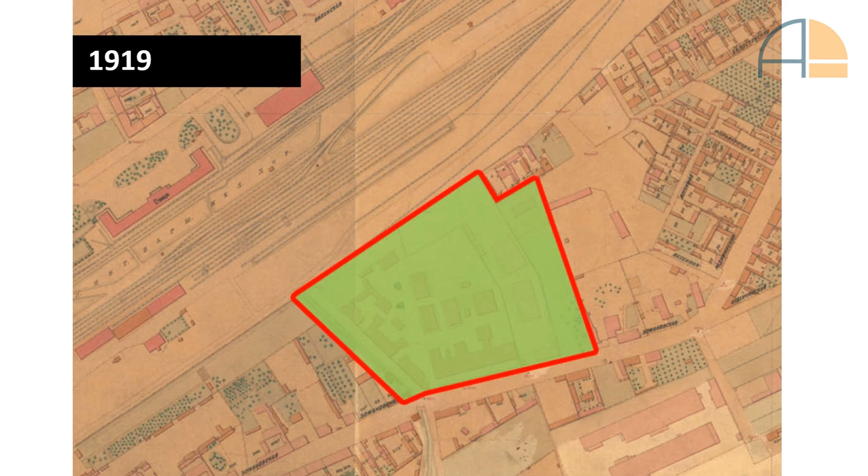In 1923, a national mint was located in one of the buildings, which I'm going to show you later at the end of the presentation.

By 1937, the whole parcel was very densely built up. What's very important on this plan are the railways. They served as a connection between the main railway and the neighboring railway network. What's important about them is that we liked the idea, we liked the shape, and although they weren't there by the time we started operating, we decided to make a resemblance in the project for the pavings. So if you pay attention later, you can see the railway-like patterns all over the squares.

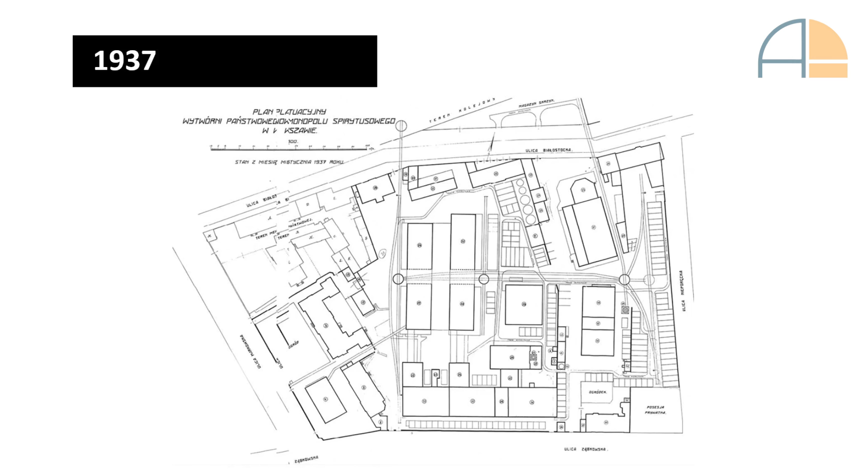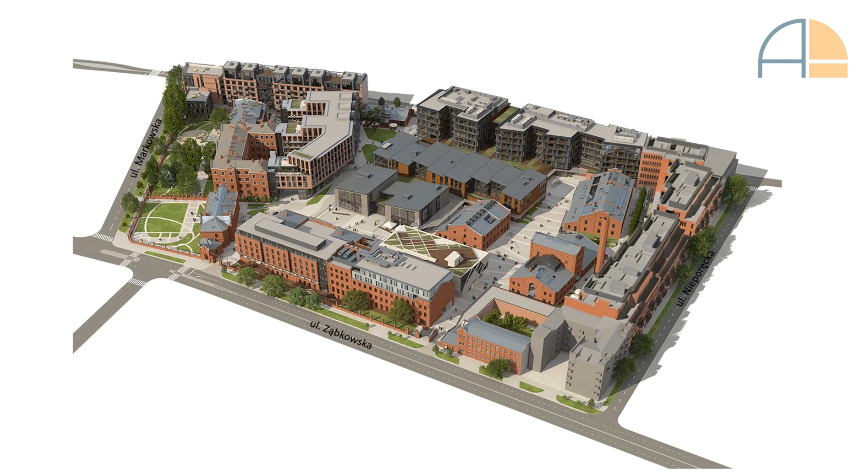So here we are. This is how it looks from up above. As you can see, it is a whole quarter of a street, a whole block, and you may notice that the buildings inside the interior are much smaller than those outside. This concluded in a feeling that when you enter the whole complex, you enter a different world. So that's a surprise.

This one here is the first one renovated, and also the most famous in the whole complex for its very ornamental architecture. This is where originally the management used to be placed.

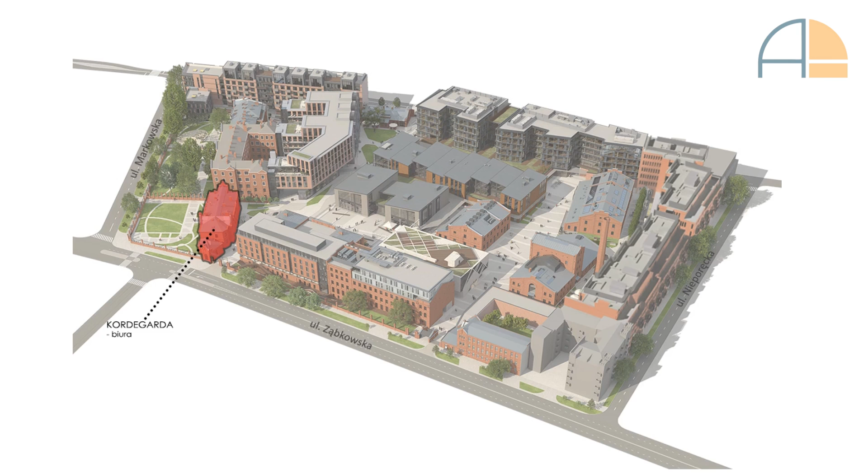Also residential, but new. These buildings, together with those I showed you before, form the residential part of the complex. One of the smallest heritage buildings in the complex was a workshop, and now after the revitalization it's going to serve as a restaurant.

The main part of the complex, formed by new buildings, contains offices and retail. As you might have noticed by now, the majority of the space is new buildings, so it was a hard task to make the old, the heritage, the most important.

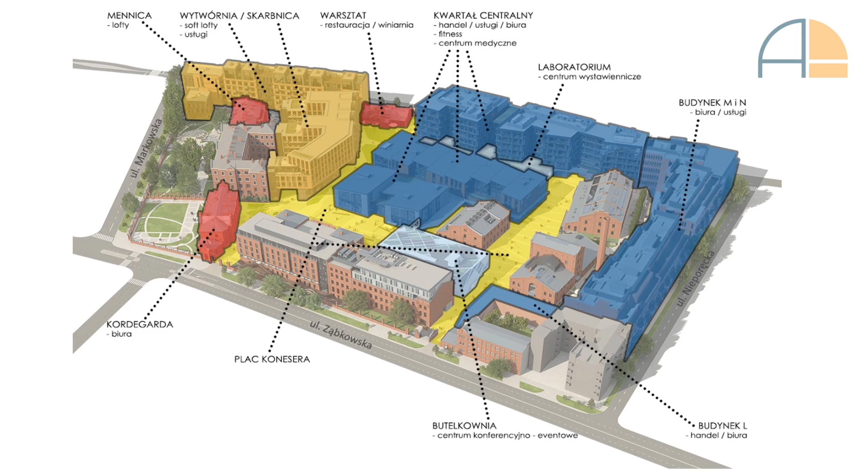A passage, a covered shopping street. Yet again, offices. And the only avant-garde building in the whole complex, that's an event venue. A heritage building with retail and offices.

A heritage building that hosts Google for Startups, one of the 7 Google-run startup venues, the others being in London, Tel Aviv, Madrid, Seoul, Sao Paulo and Tokyo, that help young people develop their projects.

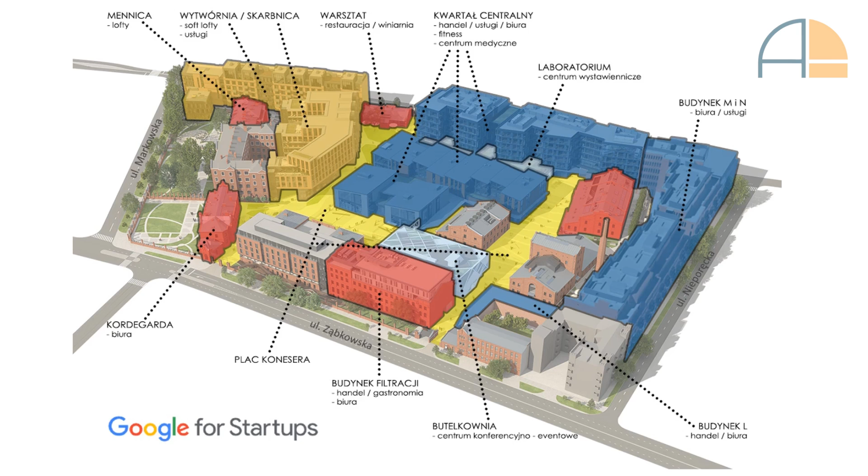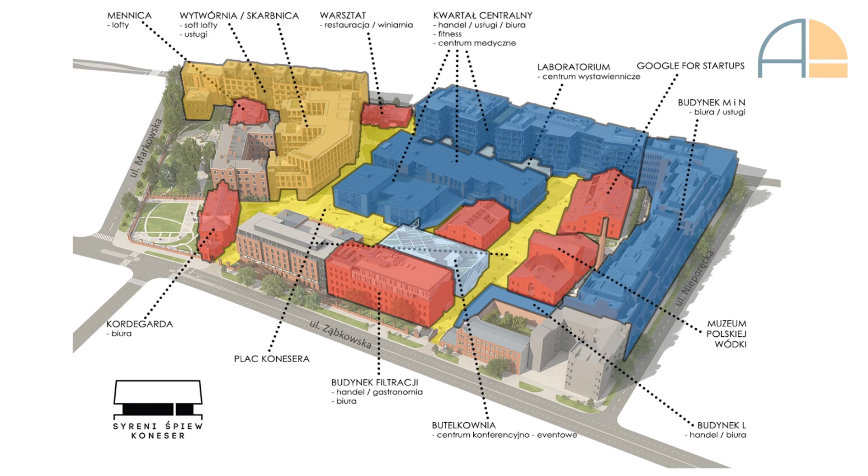A former rectification building, nowadays hosting a Polish vodka museum. A former spirits storage building, hosting Syreni Śpiew, one of the most famous Warsaw pubs that needed to find a new location. And Moxy, a contemporary branch of the Marriott hotel chain.

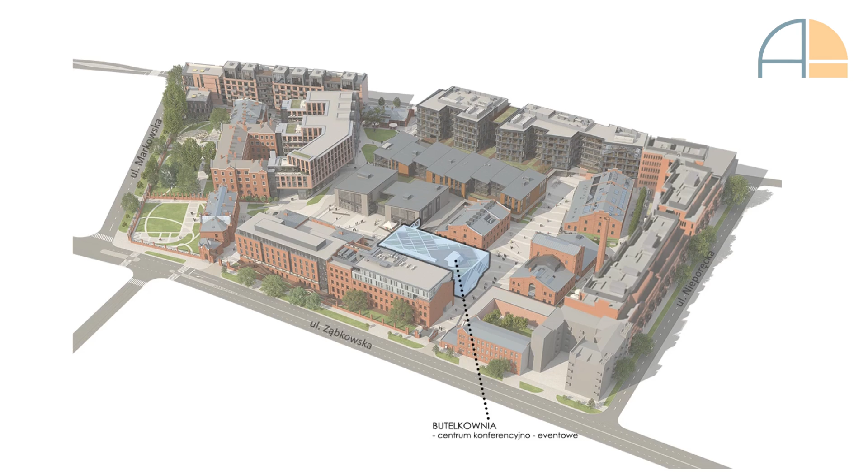So now I'm going to introduce some more details about the buildings that I listed so far. The first is going to be the building that is an event venue, also the complex's most avant-garde building. As you can clearly see, the building consists mostly of one big-scale venue with an adjacent monumental staircase.

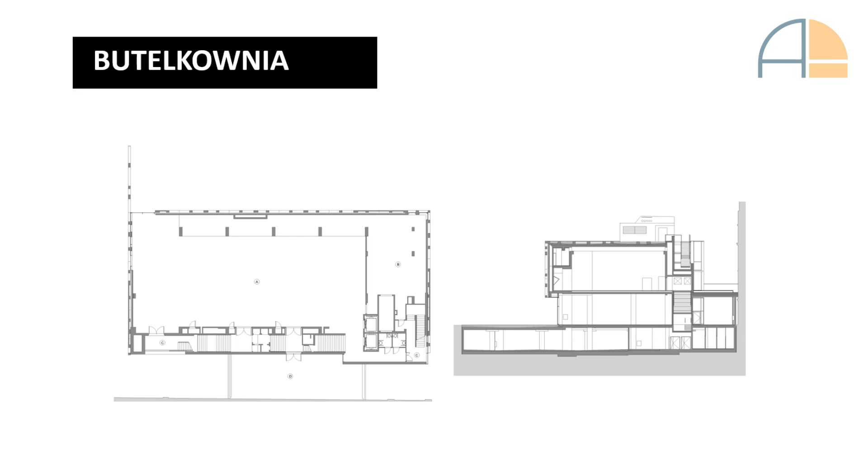There is no kitchen, so all the food needs to be catered. But what's most important is that it's one of the very few venues in Warsaw that can hold events needing huge spaces. It is worth mentioning that the building is equipped with facilities allowing different kinds of fairs to take place, including display of cars on the first floor.

I forgot to mention the previous building has been designed and managed by my colleague Sławomir Stankiewicz and his assistants, mostly Kinga Woźniak.

And these are the residential buildings. One of them, the northern one, designed in our company, the project by Krzysztof Matwiejuk, and of course with the help of his assistants, mostly Łukasz Malaszewski and Iwona Moniewska.

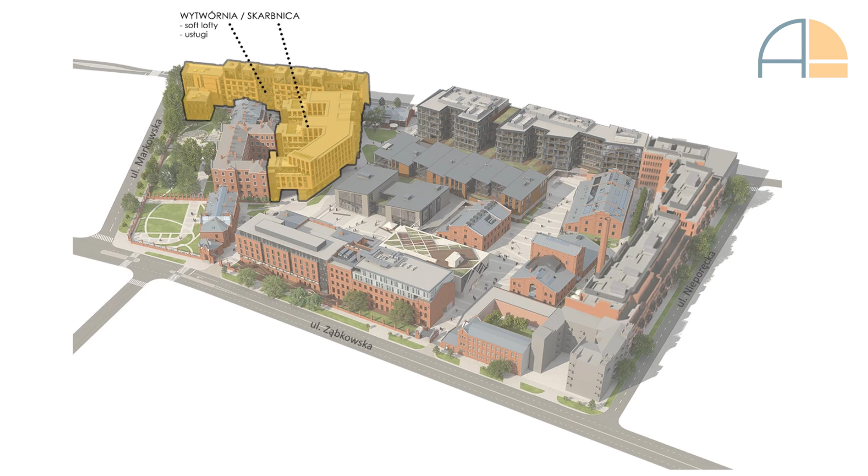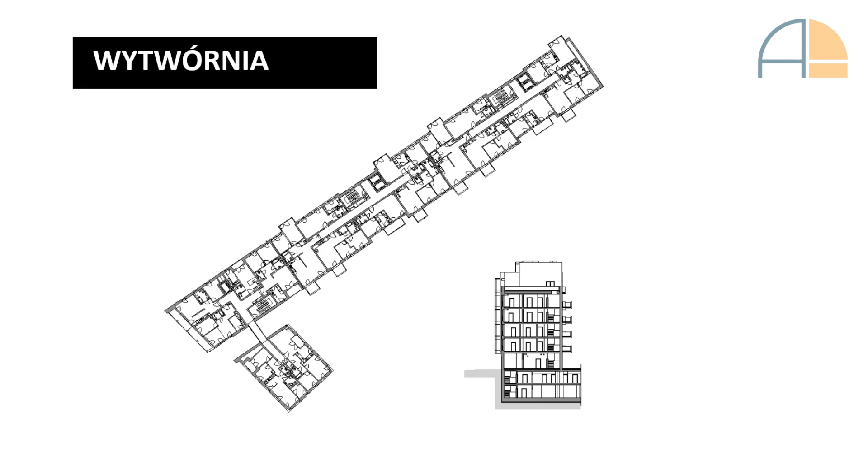And the southern one that was outsourced to a different studio, that's Are, by Mr. Wacławek and Mr. Stiasny. As you may notice, the plan is pretty irregular and consists of a variety of flats of different shapes and sizes, allowing the future residents to feel individual. In order to reduce the number of staircases, we introduced a glazed bridge over the main entrance to the edifice.

It's a high-end building, so only quality materials have been used. For instance, full-sized brick, so we're not dealing here with thin tiles imitating a brick wall. The other feature is the height of the flats themselves. It's 3 meters inside, so that's more than regular flats.

Also, the adjacent cubicles that allow daylight inside the flats, altogether with other factors I listed before, make the atmosphere of an industrial place. So we decided to call the place a soft loft place. That is, these are not lofts because the building is new, but the general atmosphere to it is like an industrial place.

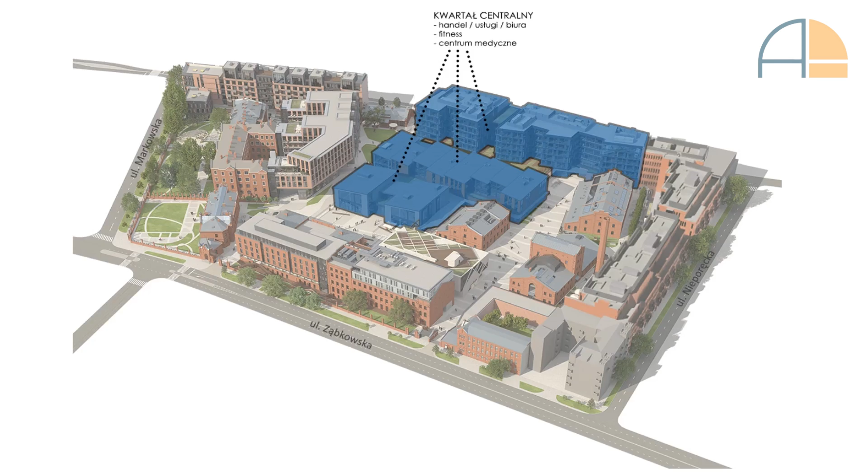So what nowadays everyone does is putting all the equipment on top of the roofs, was not an option. The building consists of 3 parking lot floors that have connections with all the surrounding buildings, including the old ones. The ground floor plan consists of 3 different zones connected with a roofed street. The size and the shape of those zones is inspired by the buildings that previously stood in the very same place.

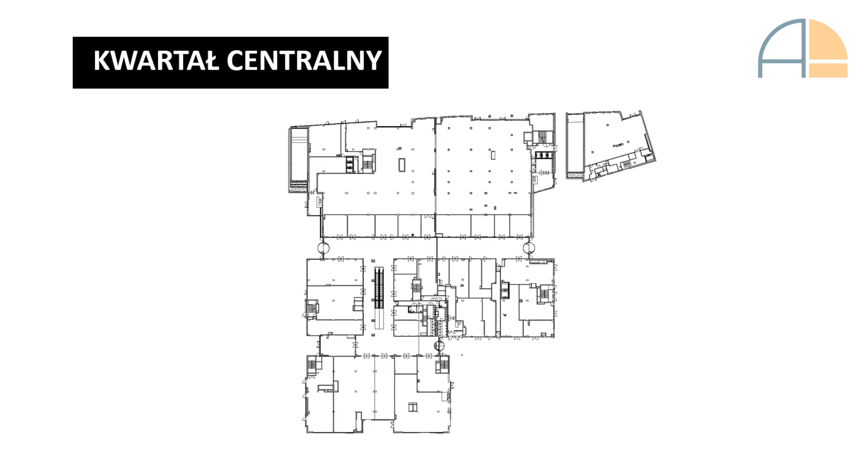On the 3rd floor, you can see how gradually the buildings are ascending towards the outer line of the complex. Cross sections - the upper right one clearly shows the ratio of what's underground and overground. As I told you, the vast majority is underground. And the lower one shows, among other things, the trusses supporting the roof.

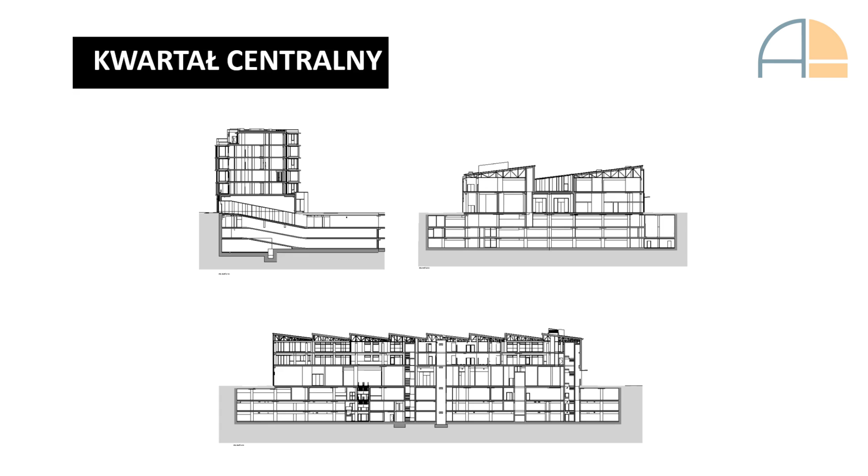And finally, my favorite, the first heritage building that I'm going to describe to you in detail, the project by Jacek Michalak. And yeah, this is the one that I can say I also have some contribution in, since I'm the person who's dealing with all the heritage stuff in the company.

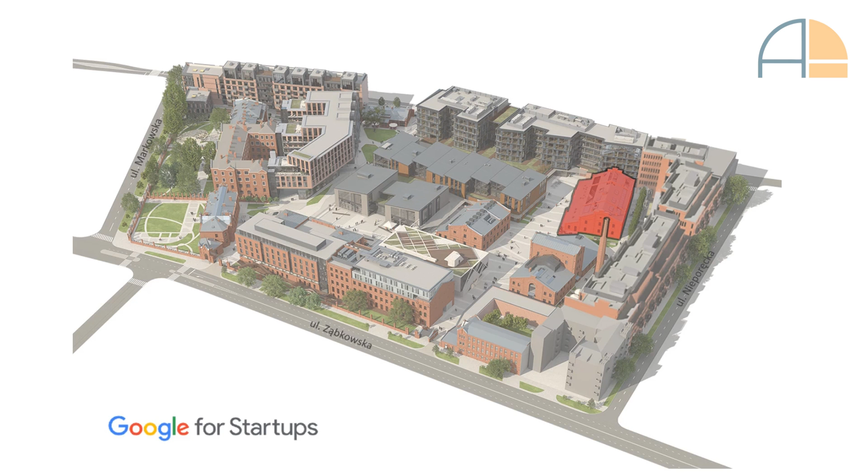Juvenes-Projekt as a studio was responsible for the overall management and the outside architecture of the building, but the interiors are outsourced to Massive Design Studio. Therefore, I've been more concentrating on what's going on outside. This is how it looks nowadays.

The ground plan of the original building - the funny shaped roundish things are foundations of the huge silos previously containing spirit, that were a problem since they were measuring more than 1 meter in height, and they are all made of concrete.

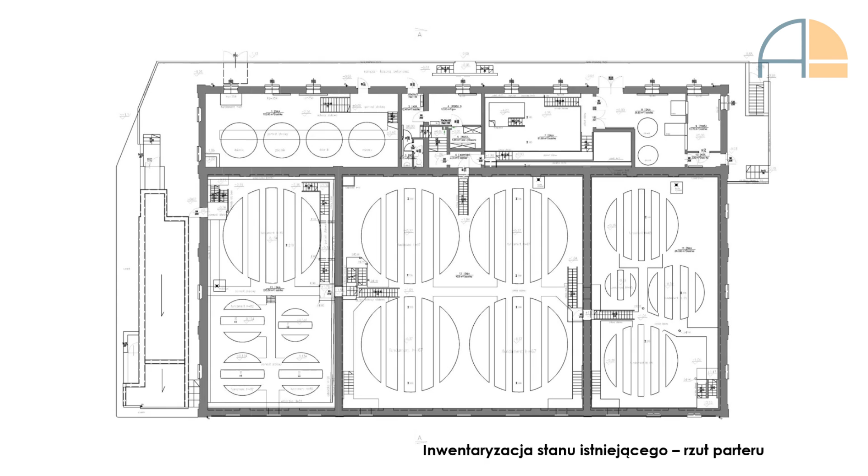Please pay attention that the whole space is quite vast in size. By the time we got into the building, there was almost no equipment. The huge silos weren't there, but there still were some operating units from the 1980s and old phones from the 1980s probably, that weren't really protected by the authorities, but still we decided to use them later.

And that's the same floor after the renovation. So basically what we did, we just left the major walls standing, and we removed all the later walls from inside, allowing the new function to take place.

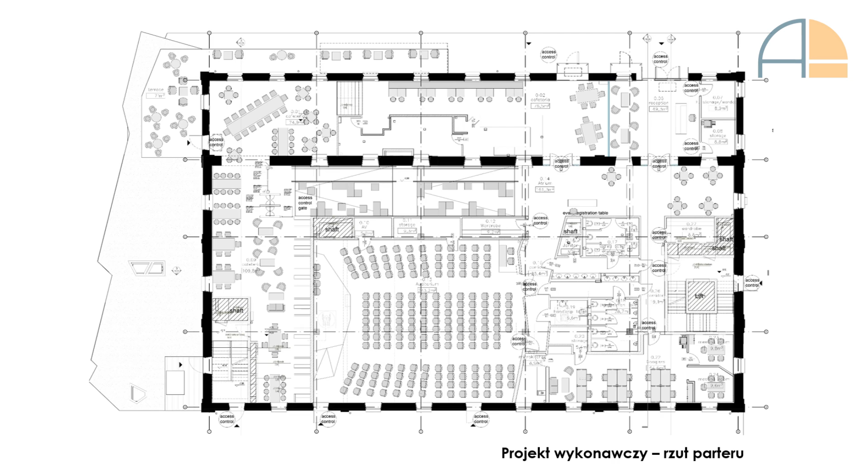And that's the next level. So previously the whole space was one space. There was no division for floorings, but since the new function needed more space and didn't need these big heights, the whole building was divided into new floors.

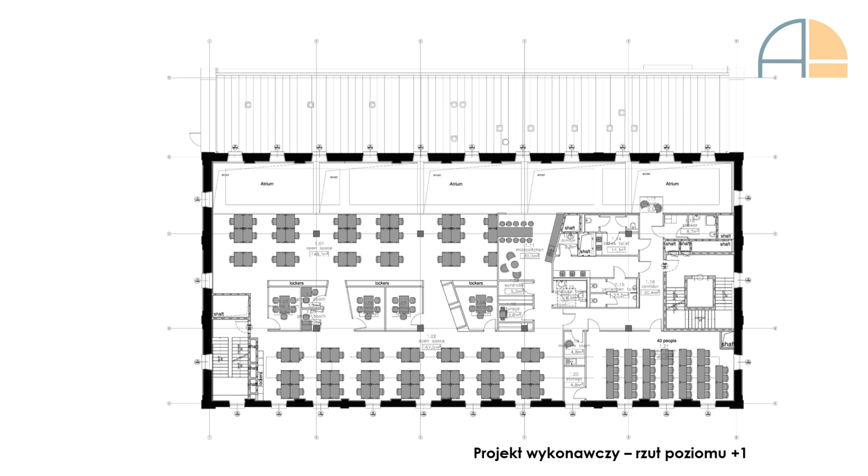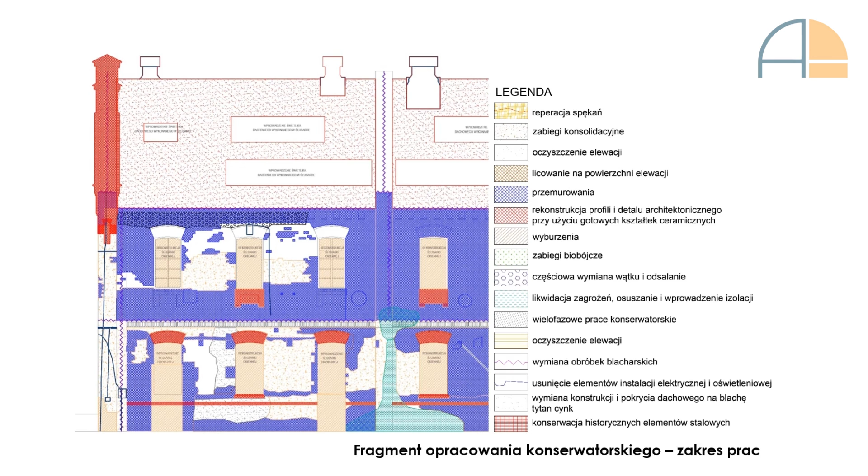Before taking any actions, there has to be a survey done. And here you can see a facade with recognition of different issues that are going on the wall itself. It's all in Polish, but basically you need to recognize everything that's there in order to choose a proper way of restoration, whether it is just renovation of the facade, or replacement, or reintroducing the windows and doors in their original positions.

Since the whole complex is equipped with two or three levels of underground parking, we needed to lower the foundations of the existing heritage buildings. In this case, the technology used is jet grouting.

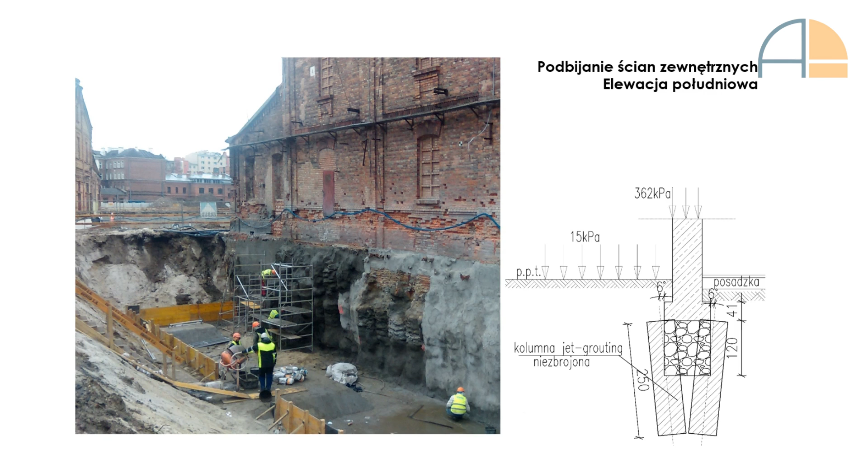As I mentioned before, we managed to find some pretty interesting artifacts all over the building, and although we haven't been the studio that designed the interiors, we gave those objects to the architects of Massive Design Studio for them to use in their project.

What we are dealing with here was a scale used to weigh wagons filled with spirit in the 19th century. Although the object itself wasn't protected by authorities, it was breaking our heart to just get rid of it. Although it was in very bad shape, we decided to renovate it and find it a new function.

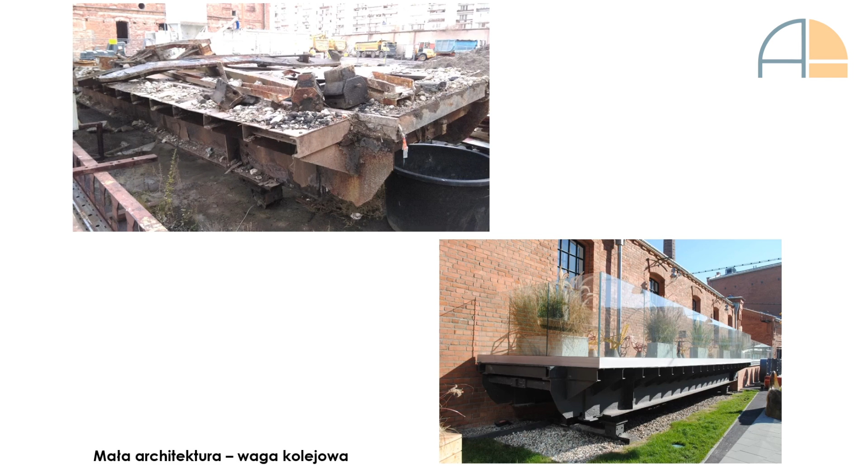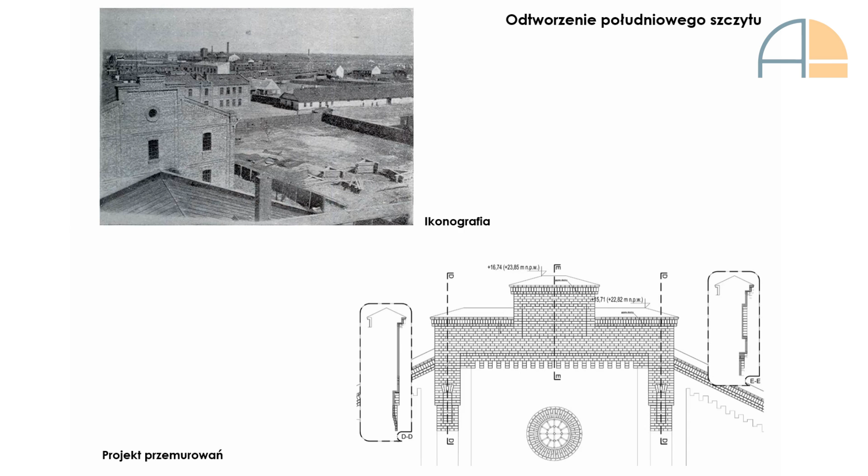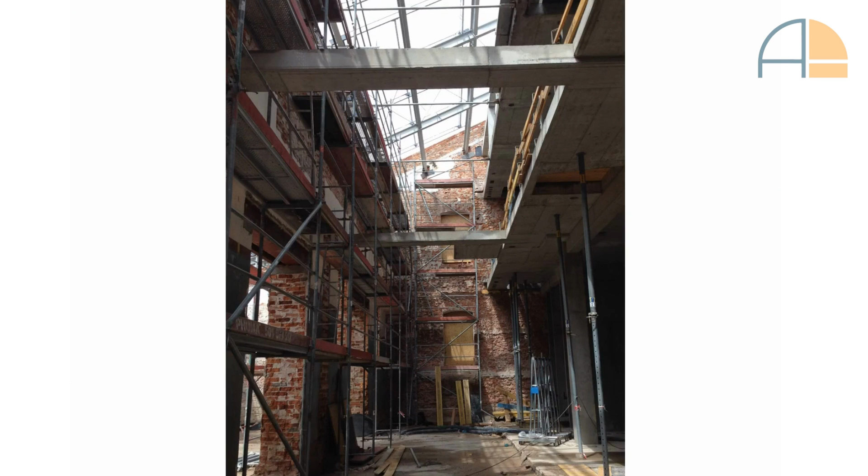Here we go. This is before, and this is after. Before, and after.

Before and after. Before and after.

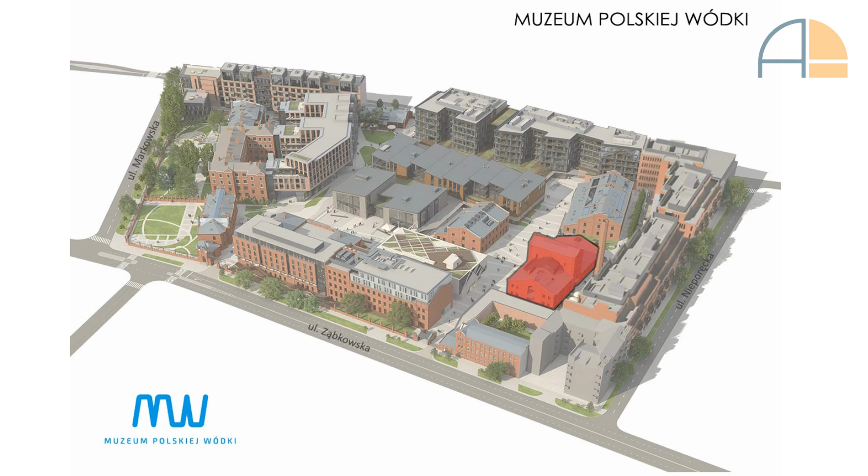Next comes another heritage building, the most spectacular one, the former rectification tower that now hosts Muzeum Polskiej Wódki, the Vodka Museum. The project was led by Sławomir Stankiewicz and his team, mostly Kinga Woźniak, who handled the general management, exteriors, and main construction. But for the interiors, it was an outsourced studio chosen by the museum, Nizio Design.

Some outside views. That's the only building that preserved the original metal windows, which served as a sample for reconstruction of all the other windows across the complex. What you see here window-wise are all new windows that fulfill the thermal needs of contemporary buildings, so they are all warm.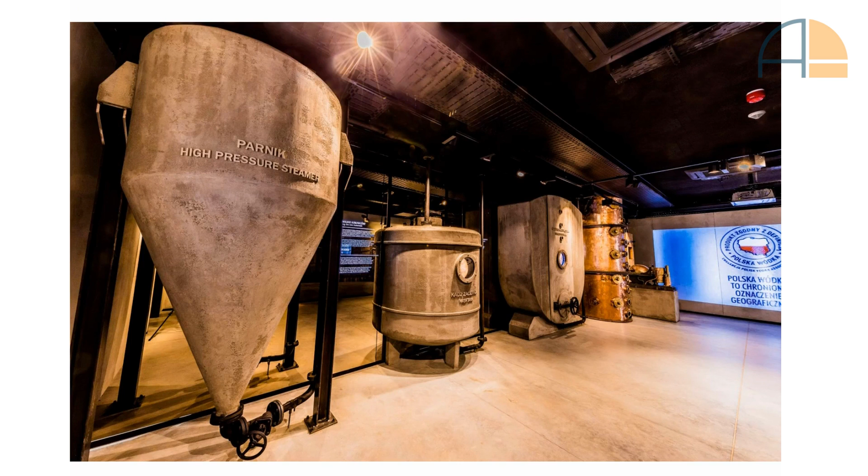Some more views of the interiors. I recommend visiting the museum.

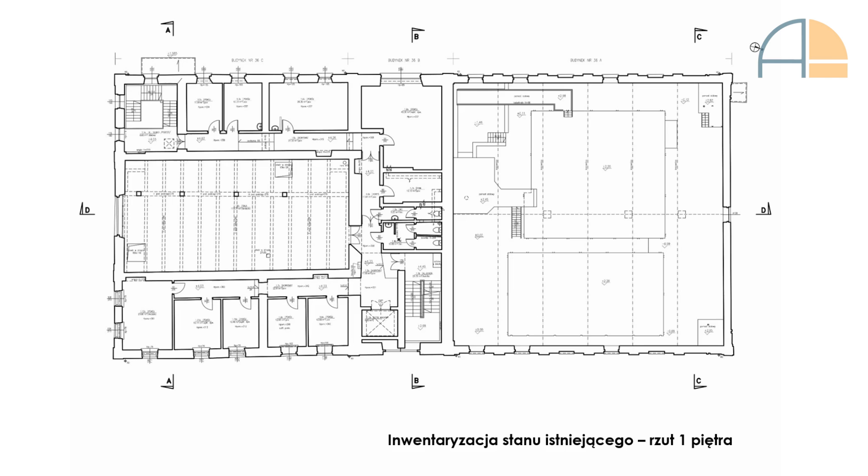And the last thing is the staircase in the upper left corner, which I'll describe later too. So there it is, this is the project. You can still see those 4 pillars. The staircase and elevator moved from the main central space to the left, and you can see the big spaces cleared up from the smaller divisions.

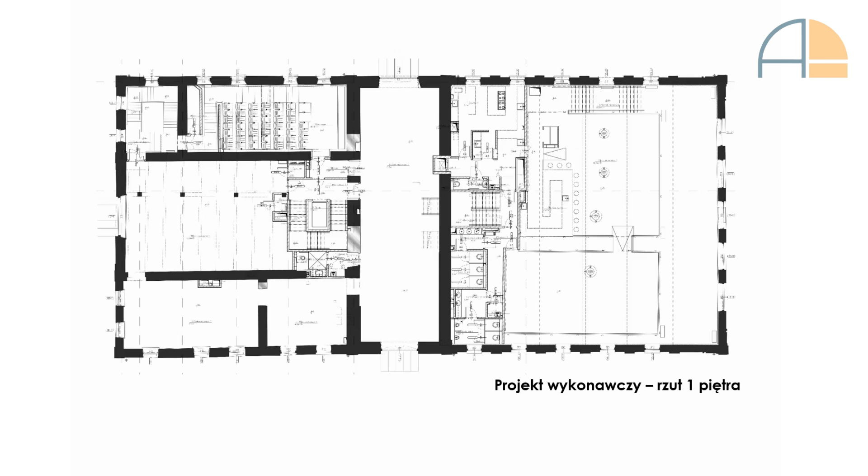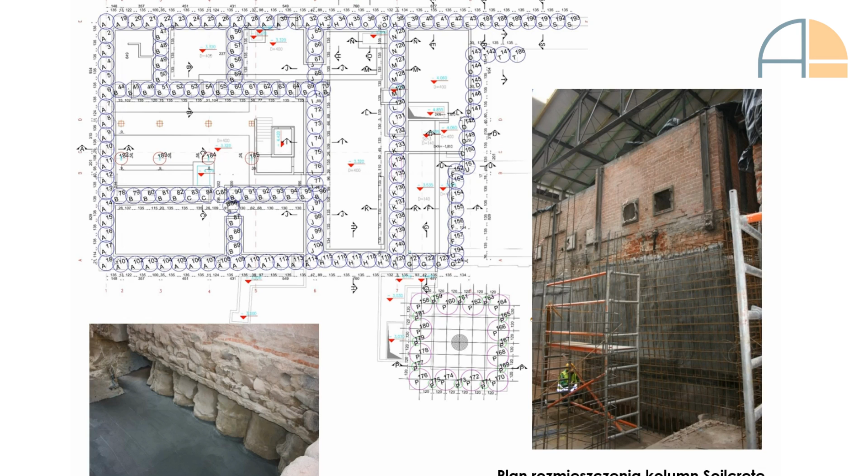Yet again, the same thing. We needed to lower the foundations, so just jet grouting again. To the right you can see the same process under the huge boilers. There were really immense boilers inside, the only preserved original equipment of the vodka factory, with the exception of smaller minor silos, all of which are being used in the decor of interiors. So finally we get to some interesting engineering.

This picture shows the project of suspension of the pillar. You may remember it from the first floor drawing that I showed you of this building. What you're seeing here is a way of managing and putting the jet grouting under the not so deep foundations and creating the basement that wasn't existent, in order to connect the building with the parking lot.

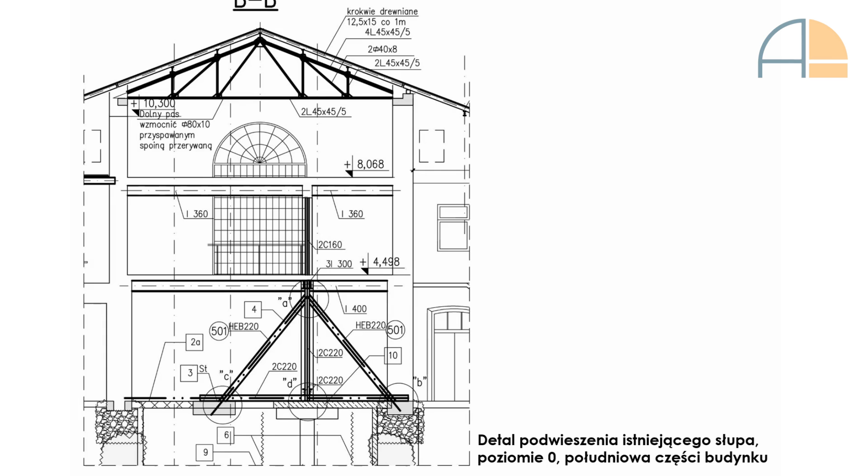One of the things was to make the railing, the banister, higher. Here, the banister is more or less 80 centimeters, and we need 110 in Poland. Between the poles, there mustn't be any free space unless it's less than 12 centimeters, so basically we don't fulfill that here. But we really wanted to keep the poles, which are from the first phase of the building. They are 19th century and they are cast.

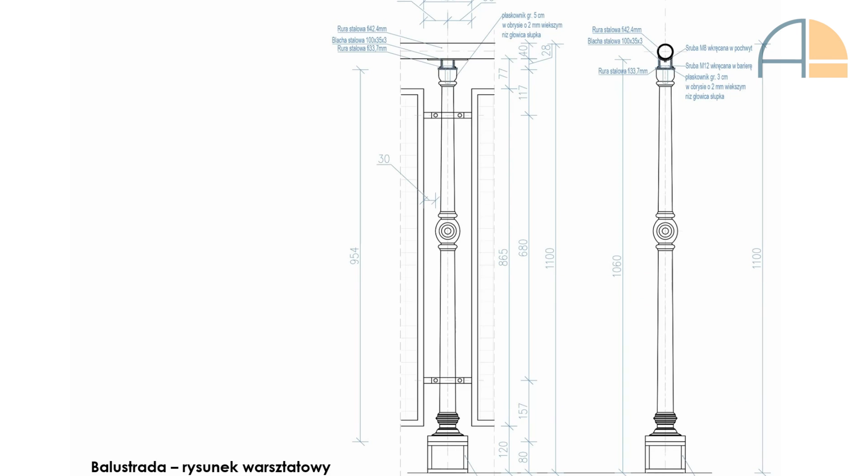So this is what we've done. We used the old poles, and we added some extra extension from below. This is the cubicle there, and we added some extra extension from above. That's the reconstruction of the staircase. As you can see, it's the same style, but since the original material was in decay and deteriorating, we needed to replace it with new material in the original shape.

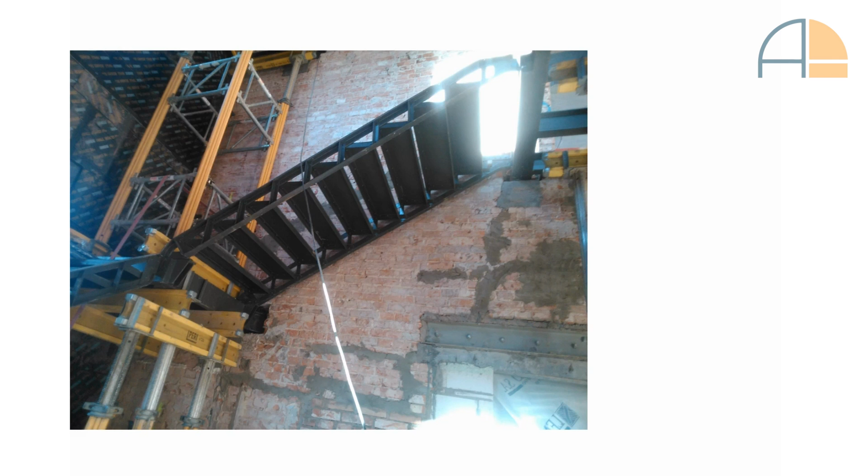So that's the result, or maybe not quite the final result. This is the very last stage of the building, but you can already see that we used the cast poles and the spaces between them to fulfill the laws, as well as the main structure. So it still looks pretty historical, although it has been changed.

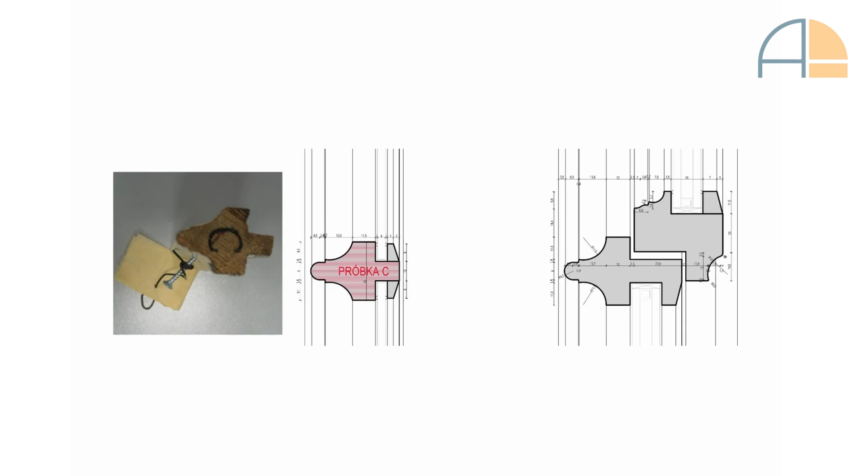A different section, but the same story, except I wanted to warn you it's not as easy as it might look. Every single manufacturer delivering the reconstructed windows at first wanted to change the profiles into modern ones that only partly looked historical. Unfortunately, the contemporary profiles meant to look historical actually have a different set of profiles. So we literally made the manufacturers buy new cutting profiles for their lathes in order to make a precise, exact reconstruction.

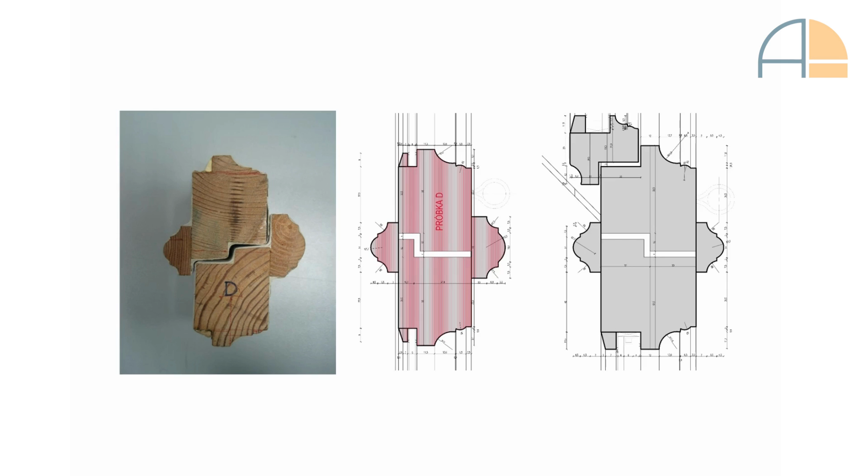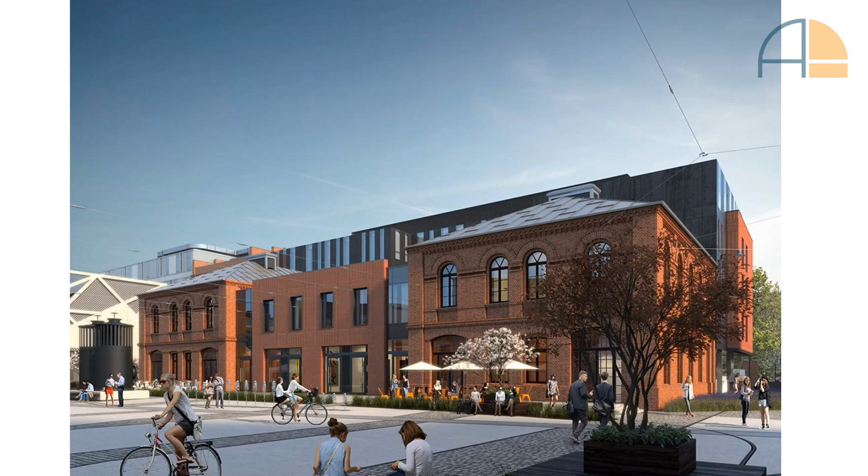The Moxy Hotel is a tricky building in that it is a heritage one, but only partly. What you see here is the only surviving part of the old building - the two outer parts, which obviously look older. This building had quite a destroyed facade. The other original part of the building is its cellar, which I'll describe shortly.

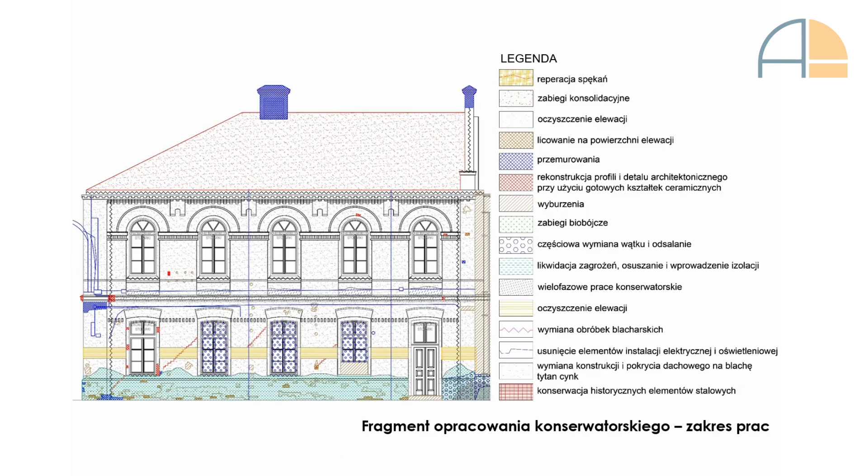Yet another survey, showing the state before. As I told you, the facades were in decay. The original brick wall had been replaced by plaster formed in the shape of brick.

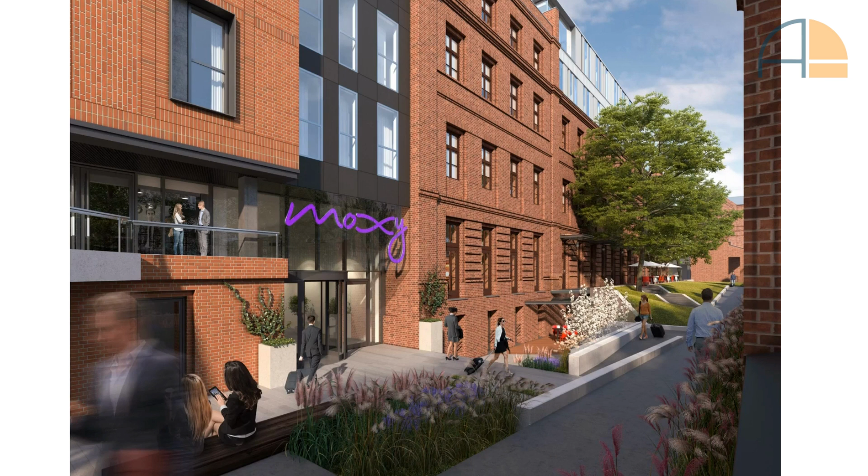As you can see, the main lobby of the building is on the underground level. This is mostly due to the fact that the original cellar was the only surviving part of this section of the building, so to use it in the most spectacular way, the idea was to put the lobby underground. But since the lobby is the most important part of the building, there had to be an idea to solve this problem.

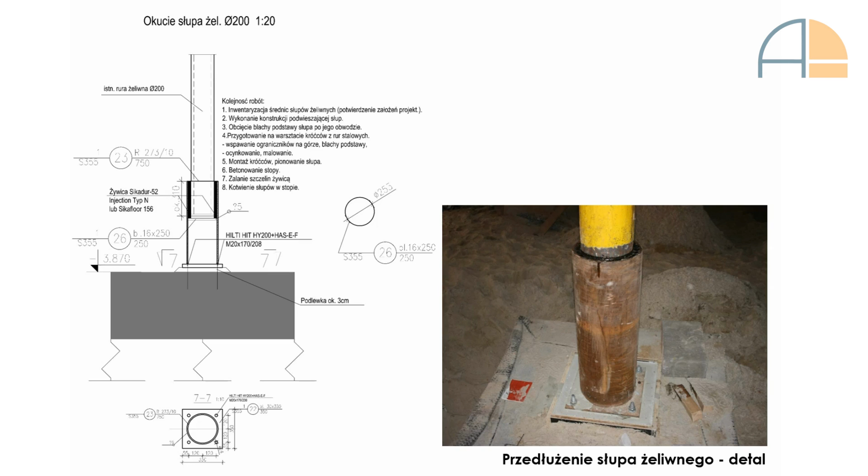Of course, like all the greatest ideas, there's always some problematic aftermath - in this case, it was the height. We needed bigger, more spacious rooms for the lobby, and since the original cast pillars were too short, a solution had to be found. What you see here is the engineer's solution to lengthen the pillars.

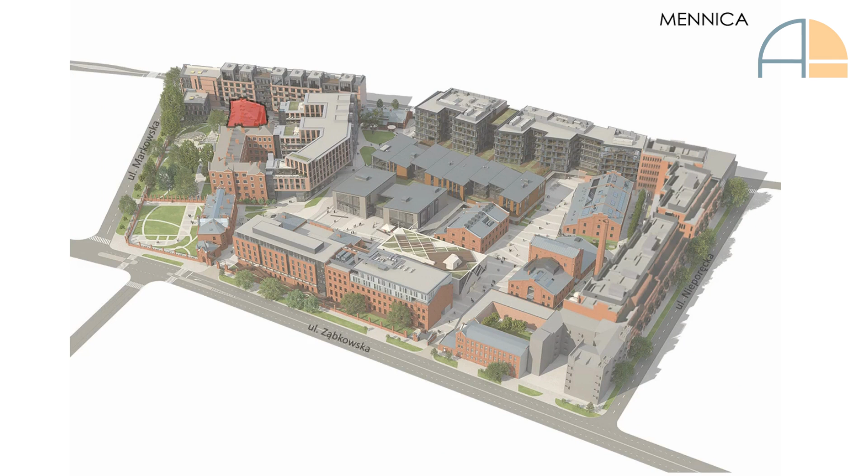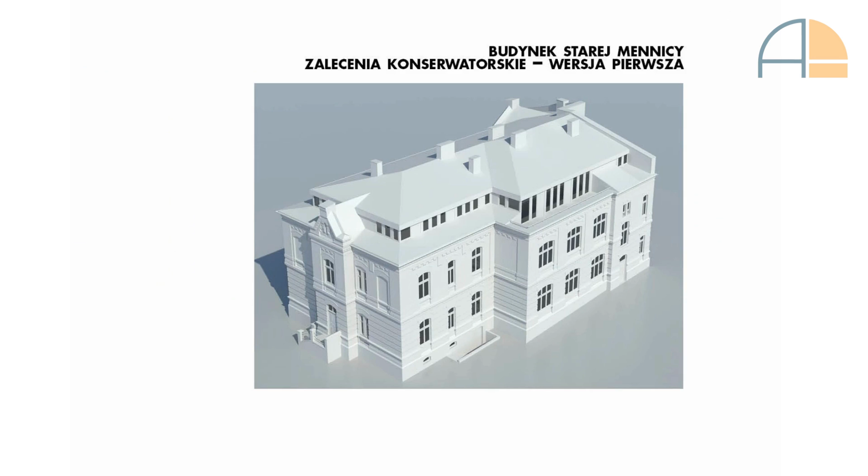The last building I'm going to describe is the former Mint that changed its function to residential. This is how it looked when we got there, and this is how we wanted to change it - basically, we wanted to add an extra floor to gain more space for the flats. And this is when the authorities came in.

I really like this example because obviously I can understand the developer who is doing business and wants more income from his work, but also obviously I can understand the heritage authorities who want to preserve the building in the most proper shape. So what you're going to see next is a compromise between the business and, let's say, the conservatory point of view. Voila - and I think this is a good compromise.

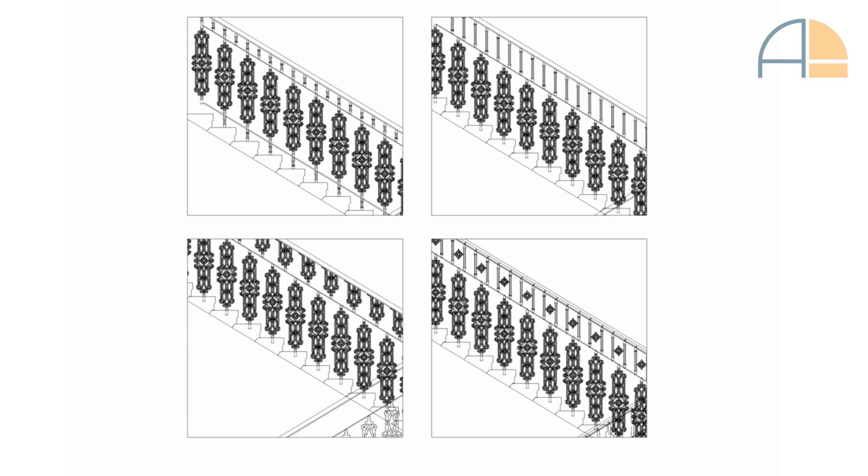These are the ways we tried. Basically, the more we wanted to stay in the style, the worse it looked. So in the end, we decided to bend the rules a bit, and that's the result. I really think it looks good.

What you can see here is the upper part, which is the original baluster, and then the lower part, which is also cast, inspired by the original. It's a detail, but you can imagine that we did cast balusters—that's something very, very unusual.

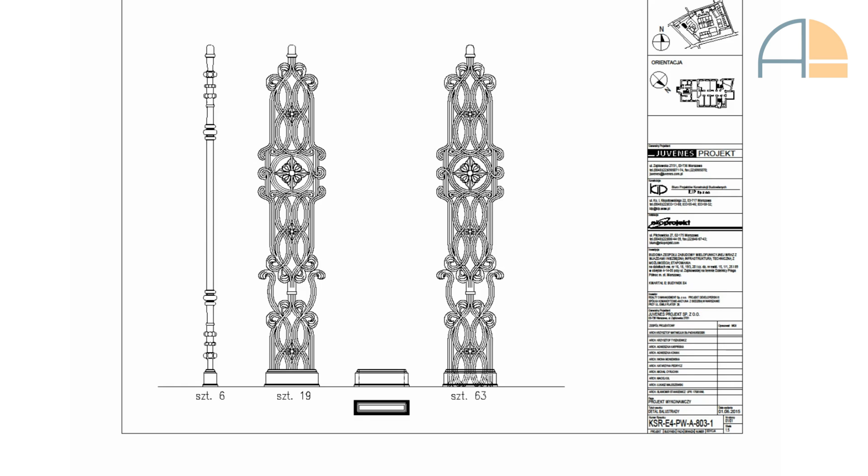This is the outside of the same building, more or less the same situation. Here we have maybe an Art Deco outside staircase—well, let's call it stairs. Same problem: the sizes of the steps themselves and the banister. So a quite smallish looking staircase needed to be changed into a vast construction because of contemporary rulings. But we managed to keep them in the style.

And that's the last thing I wanted to show you. I told you about the authorities and regulations—we are obliged to protect the protected buildings. But what if something's not protected, but is historical? This is a case.

Originally, this building was the security house of the complex. Then it was changed into a transformer station. So, we could have just pulled it down and created the entrance to the complex here, because this is what we wanted—a broad entrance to the complex. But on the other side, it was so heartbreaking to just pull down an original wall, which is only a part of the original building, but still it was sad.

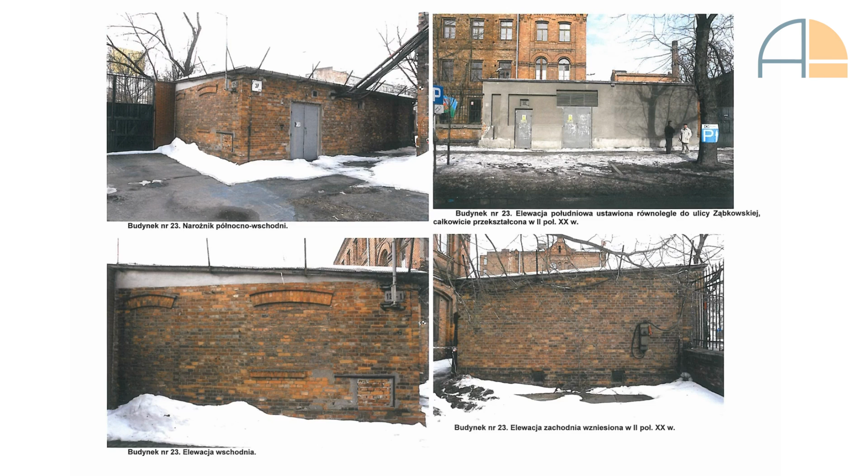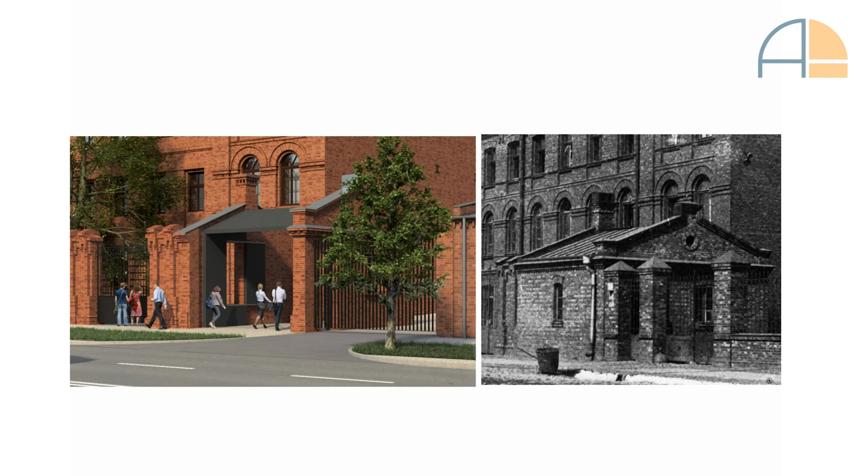So what we did is we just recreated the top of the main wall that survived, which you could see in the previous picture, and we recreated the shape of the roof as a roofing for the main gate. But since we didn't need the main entrance on the wall facing the street—we needed the main entrance elsewhere—we just didn't recreate it there. So basically what you see to the left is the shape of a house using the original wall with a partial reconstruction.

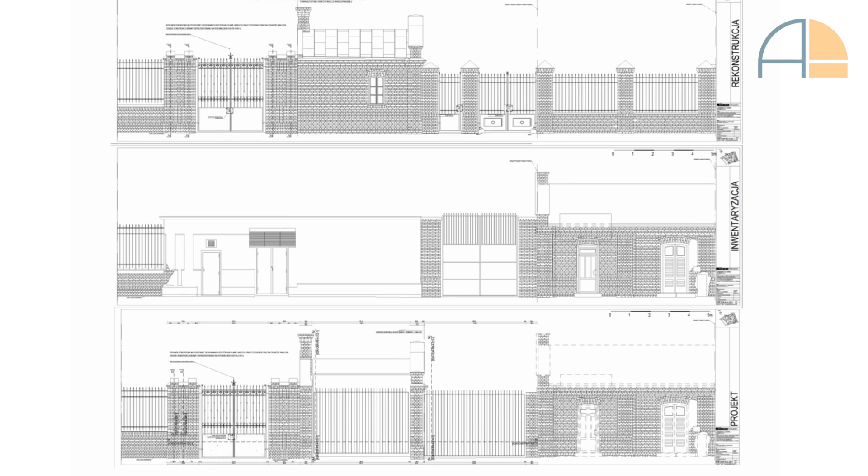And these are some parts of the original blueprints that we used to reconstruct it. The one above is the original state, which we haven't seen ourselves and can only see in the picture. The middle one is what we got when we arrived, and the lower one is the project itself.